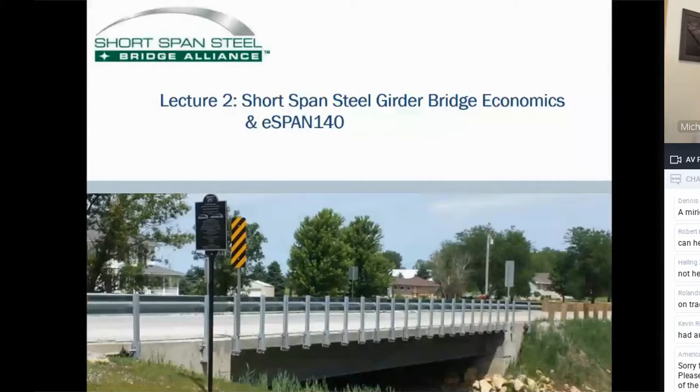As mentioned in previous webinars, the Short-Span Steel Bridge Alliance was formed to address two main concerns with the construction of steel bridges. The first is a misconception across the United States that for shorter span bridges, concrete is always less expensive than steel. The second issue is that a concrete bridge is easy to design using charts and tables, whereas a steel bridge design is an individual piece of art for each designed bridge.

Last week's webinar presented eSPAN140, an online tool for preliminary steel bridge design for simple span bridges up to 140 feet in length, so that steel and concrete bridge alternatives can be compared easily without an undue and costly design for the steel bridge.

Here, we will look at initial cost case studies for county and state bridges to show the competitiveness of steel and demonstrate that the life cycle costs for steel and concrete bridges are also competitive.

We start with that preconception that concrete bridges are less expensive than steel bridges in the short span market. Many owners and engineers believe this to be true, and many times steel is not even considered when there is a short span bridge need.

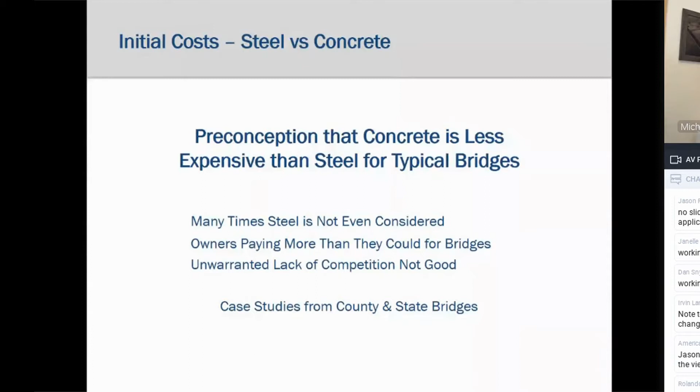The first case study is from Audrain County, Missouri from 2012. Dr. Michelson last week touched on this case study and a few more bridges there, but here we're going to go into it in a little more detail to really show the competitiveness of steel.

These two bridges were built by an Audrain County work group, so there is no contractor for the bridges. This is a special case study in that the Short Span Steel Bridge Alliance worked with the county engineer from before construction through the opening of the bridge to track all costs.

The steel bridge, Missouri Bridge 411, consists of 4 steel girders, a 47.5-foot span, a 24-foot roadway width, and a 2-foot structural depth. The concrete bridge, Missouri Bridge 336, consists of 6 precast hollow core slabs with a 50.5-foot span, a 24-foot roadway width, and a 2-foot structural depth.

These two bridges were built in the same year and are nearly identical except for a small difference in the span length. The engineer was asked to keep a detailed account of the costs for the construction of the two bridges so that a direct comparison could be evaluated.

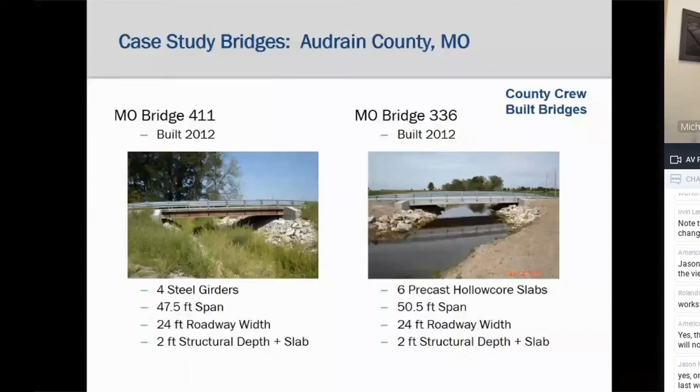This slide shows the total cost for the two bridges where the costs are broken into material, labor, equipment, guardrail, rock, and engineering. We can see that for the total cost of these two bridges, the steel bridge has a 19.3% savings over the concrete bridge.

The costs are calculated based on the square footage of the deck area for an equivalent comparison, since the concrete bridge is 3 foot longer.

However, comparing only total costs can be deceiving given the different site characteristics of the two bridges. For instance, here, we see that the concrete bridge had significantly higher engineering costs and lower rock costs, which has nothing to do with the actual constructed bridge.

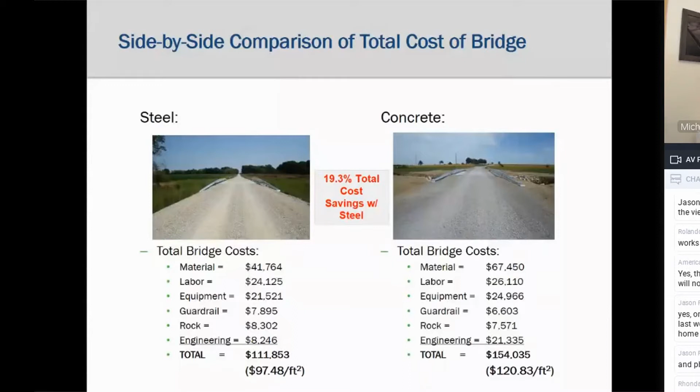So to address these differences, the engineering and the rock costs are removed from the total cost to get a better comparison between the two bridges. When the engineering and the rock costs are removed, the concrete cost a little bit over 98 bucks a square foot, whereas the steel bridge had a cost of just over 83 bucks per square foot, or a 15.4% reduction in cost.

However, we know there are still different site requirements that may influence the difference, such as roadway alignment work, approach work, grading and finishing, and other work.

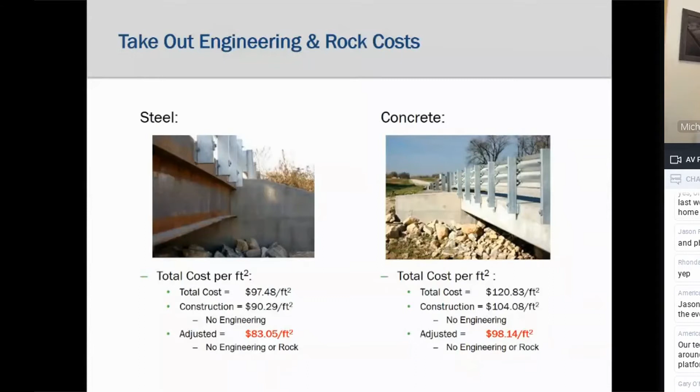So the engineer was also asked to separate out only the superstructure costs so that an equivalent direct comparison could be made for the two bridges. In other words, track costs from when the superstructure went in until the superstructure was completed.

So on this slide, these costs represent the costs associated with only the superstructure. This is a true apples-to-apples comparison of the costs for these concrete and steel bridges, since we could almost pick up the concrete bridge and put it on the steel abutments and vice versa. Removed from the total cost is all site prep work, grading, engineering, rock, abutments, and so forth.

We can see the cost for the materials, labor, and equipment for only the superstructure. The steel bridge costs $37.54 per square foot, and the concrete bridge costs $50.61 per square foot. The steel bridge is considerably less expensive for this comparison.

Now, one item to note is the equipment cost, where the steel bridge used a county-owned 30-ton crane. The concrete bridge girder members are heavy, and the county had to rent a 100-ton crane at a cost of $3,500. The other $500 for each under equipment was a rented skid steer for incidental work.

However, even if the county needed to rent a 30-ton crane at a cost of about $1,500, that increases the steel bridge cost to only $38.88 per square foot, still considerably less than the concrete bridge cost.

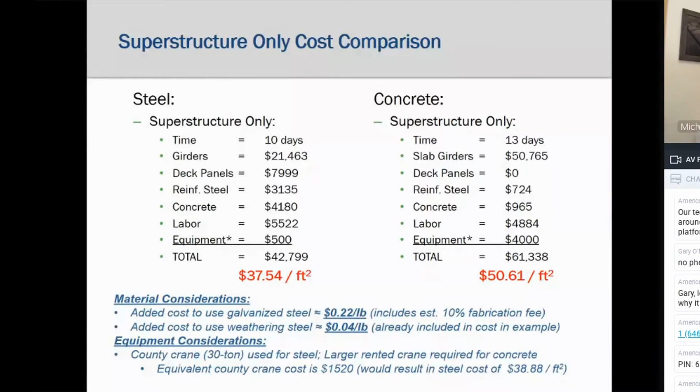So for these two bridges, as they were built, the superstructure-only costs show that the steel bridge option would have a savings of over 25% compared to the concrete bridge. That is 5 steel bridges for the cost of 4 concrete bridges.

This is for two almost identical bridges where they have the same structural depth, which means no difference in approach work, the same roadway width, the same guardrail system, the same abutments, and the same county crew built both bridges.

So what this demonstrates is that steel is competitive with concrete. Here it's actually significantly better. But the objective here is to show that steel is competitive with concrete, and the preconception that concrete is always less expensive is incorrect. Short span steel bridges can have, and many times will be, less expensive than a concrete option. The reason for these economies for steel bridges vary over the bridge fabrication and construction process.

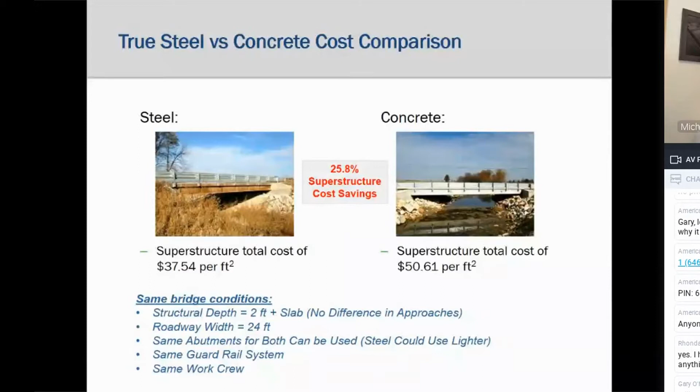For instance, we saw that one reason steel is competitive is that equipment requirements are less, since the steel bridge components are considerably lighter than the concrete components. In fact, many times, a backhoe can install a steel bridge.

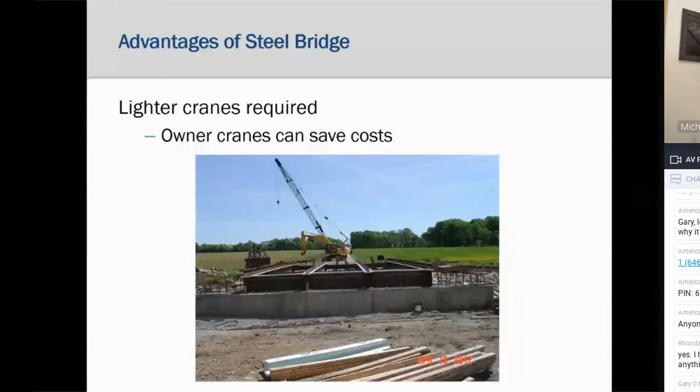For steel bridges, the dead load is significantly lighter, and lighter abutments can be used. Or some of the economical modular abutment systems can be employed, such as geosynthetic reinforced soil systems.

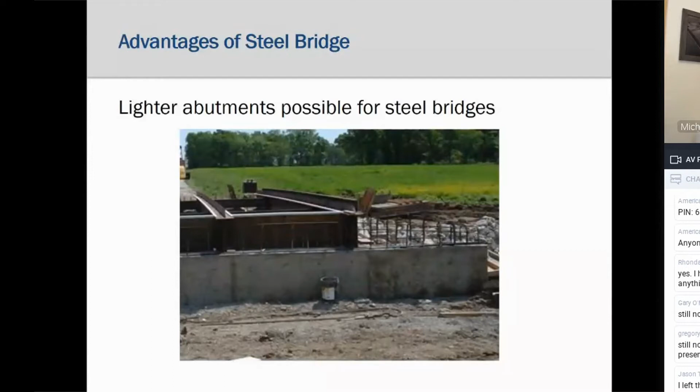Another benefit for the economy of steel bridges is the use of partial depth precast panels or corrugated metal deck systems that make the casting of the concrete deck efficient.

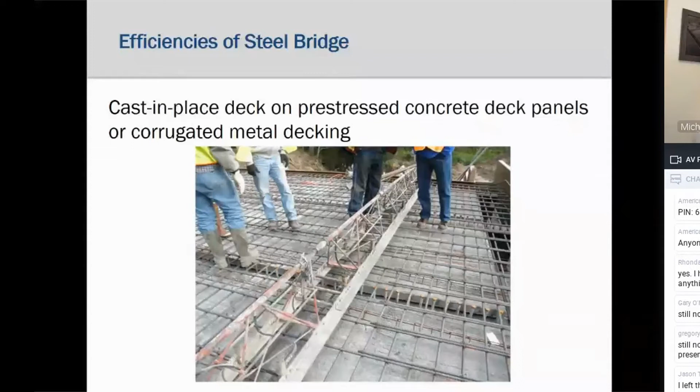We know that steel is a versatile material and that steel bridges can be made in many forms with complicated details in fabrication. However, these simple bridges do not require complicated stiffener or complicated diaphragm details. Simple details are cost-effective and easy to fabricate and easy to erect.

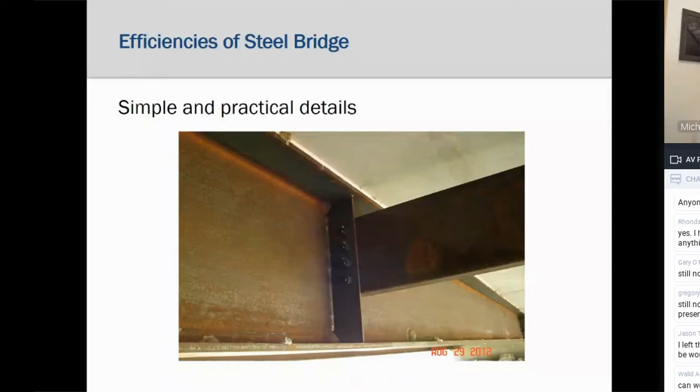Another costly component for bridges are rocker or pot bearings at the girder ends. Again, for these simple bridges, simple elastomeric bearings can be used, and smaller bearings used due to the lighter weight of the structure. Also, jointless decks with integral abutments lead to much lower deterioration rates and maintenance costs in the future.

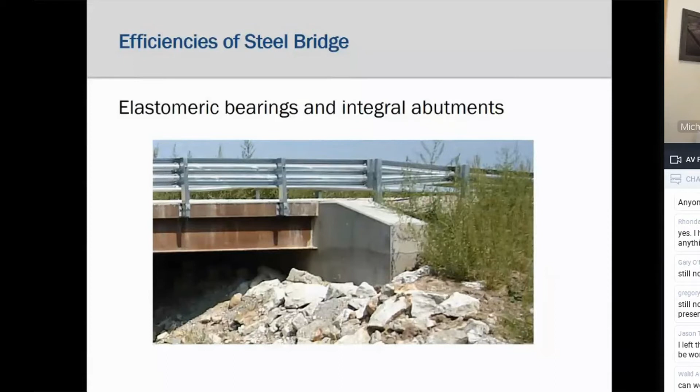Finally, one of the costs for steel bridges is corrosion protection, since regular steel rusts. However, weathering steel, when applicable, is low cost and requires little maintenance for long-term corrosion protection. If weathering steel is not applicable, galvanizing, metallizing, painting, or the use of stainless steel may be a cost-effective method for corrosion control.

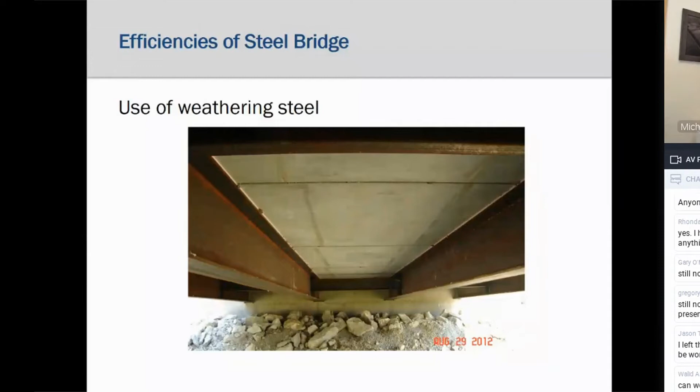So that was one example that Dr. Michelson showed last week, and we went into more detail here to show the competitiveness of steel. However, that was just one example, and like Dr. Michelson did last week, I'm going to show this table.

Because the Alliance also worked with the county engineer on other bridges built near the same time frame in the same county. This table looks at the total constructed cost. We were not able to look at only the superstructure of an additional 5 steel and 4 concrete bridges built in Audrain County.

At the bottom of the table, we see that sometimes steel is less expensive and sometimes concrete is less expensive. This is healthy competition, and this competitiveness is good for the owner and the public. These are examples of county bridges that show that both steel and concrete are competitive in the short span market, and both should be considered. The Short Span Steel Bridge Alliance has many more similar examples that are not shown here due to time.

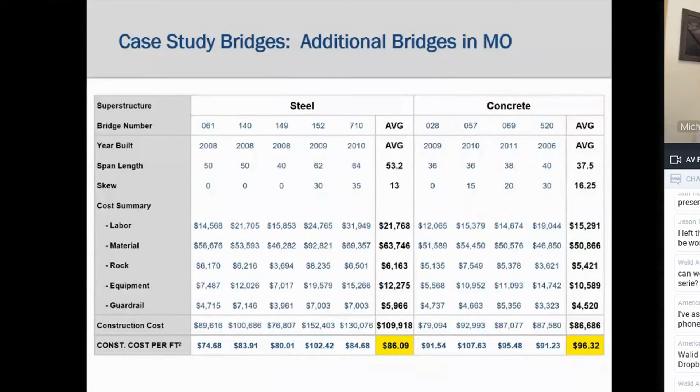So these examples were county-owned bridges. Next, we will look at a couple state bridges, also in the state of Missouri. Here are two nearly identical bridges, one steel and one concrete, that cross over the same highway near Columbia, Missouri. Both are two-span, with a concrete bridge just a little longer and a little wider, so the total cost will be divided by the deck area, again, for comparison. These were both design bid build projects with a contractor constructing the two bridges.

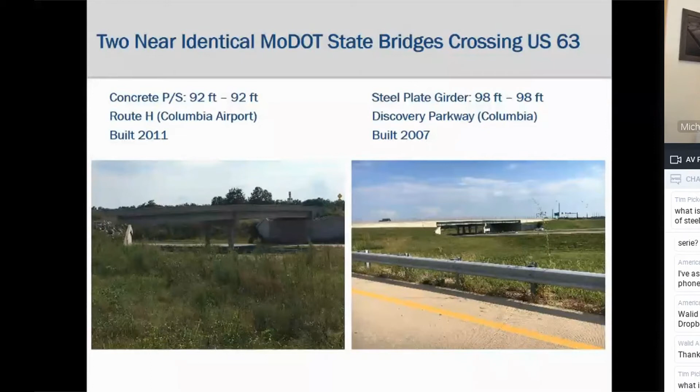Here are the costs for the two bridges. Both had non-bridge items such as conduit systems, a pedestrian fence, and an architectural facade, and these costs were removed from the total costs since they are not structural. We see that the concrete bridge costs $77.71 per square foot, and the steel bridge costs $72.94.

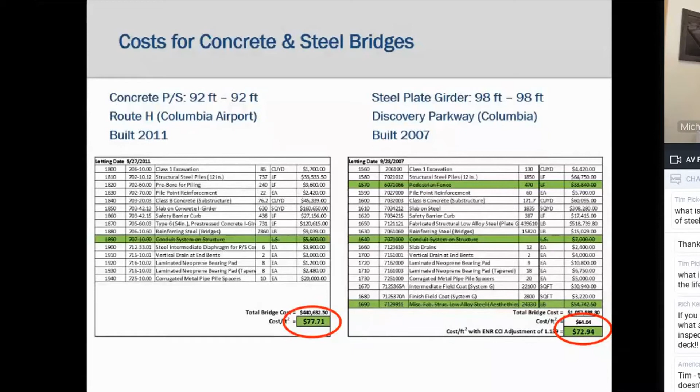However, there was a 4-year difference in when these two bridges were built. So what I did was, to account for the age difference and inflation, an Engineering News Record construction cost index of 2.7% per year was used to bring the cost of both bridges up to a common year of 2017. We see that the steel bridge was less cost at $85.58 than the concrete bridge at $91.18. Again, and not to pound on this too much, but again, two nearly identical bridges, this time state bridges, that show that steel is competitive with concrete.

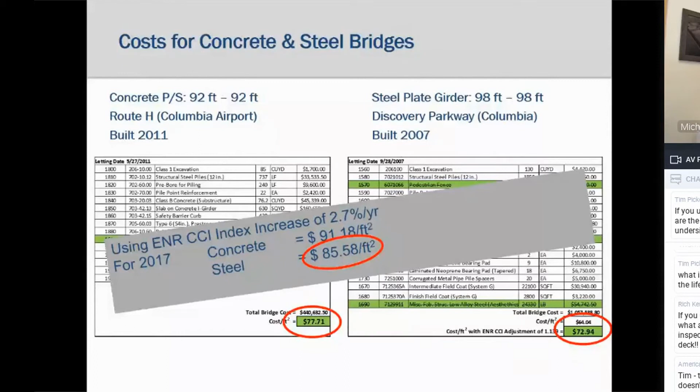So what we have seen here, and with many more examples I could have shown but have not, is that steel is competitive with concrete bridges in the short span market, and that owners and engineers should consider both materials for their bridge needs. The preconception that concrete is less expensive than steel in the short span market is a misconception. Both steel and concrete are competitive, and competition is good for the owner and the public.

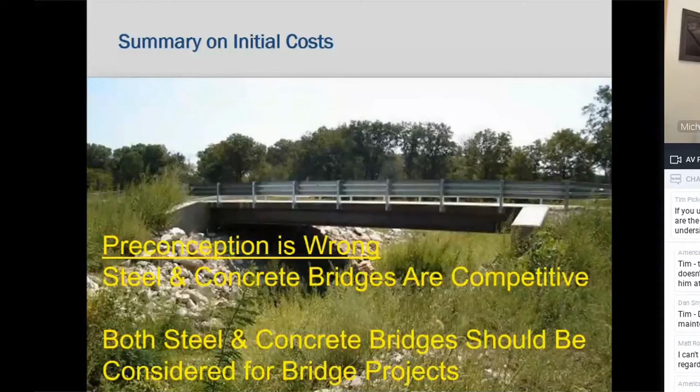So moving on, first cost is just that, the cost for putting the bridge in place. Responsible owners are also concerned about future maintenance costs and service life. The question about life cycle costs routinely comes up as we talk about steel bridges across the country. Actually, what is asked is, which type of bridge is best for life cycle costs? And both the steel industry and the concrete industry have offered anecdotal evidence, but have not, until now, had good evidence on which bridge type is best.

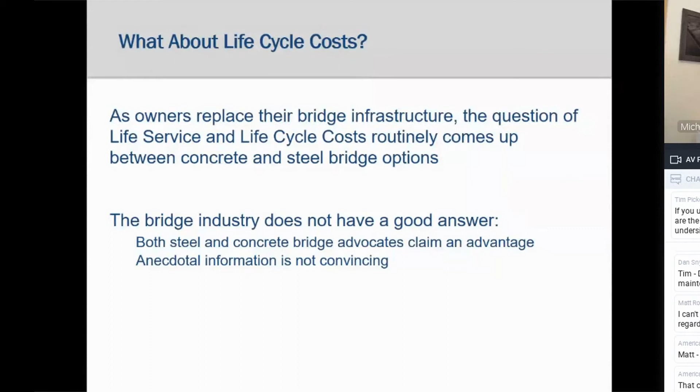So a study was conducted that examines the historical life service, meaning the performance and maintenance, and agency life cycle costs, meaning the true cost for building and maintaining the bridge over its life, of typical steel and concrete bridges in Pennsylvania. A historical study was conducted so that the results showed what actually happened to the bridges instead of anecdotal guesswork from the steel and concrete industries. The Pennsylvania Department of Transportation had good records on their bridges and offered the PennDOT data for the study.

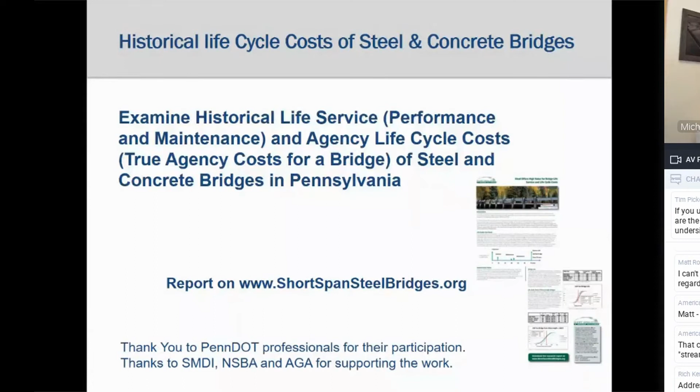To determine the life cycle cost for a bridge, one needs to know the full history of that bridge. This includes the initial cost and the year it was built, and all maintenance that occurred over the life, including departmental maintenance and contractor maintenance. And of course, the lifespan for the bridge, or when it will be replaced. All of the bridges in the PennDOT database were still in service, so an end-of-life model was needed to estimate the life of the bridge.

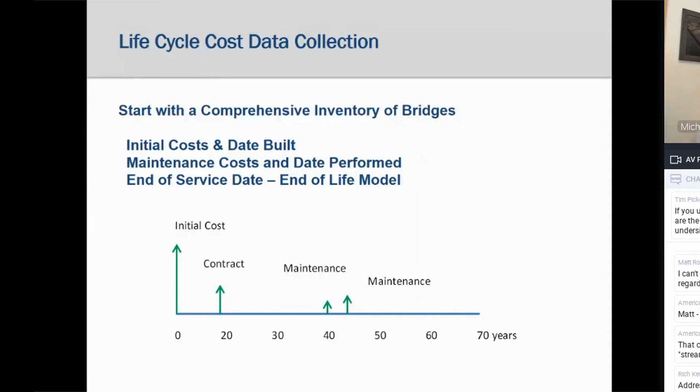The study's objective was to compare life cycle costs of typical concrete and steel bridges. So there were criteria that each bridge had to meet to be included in the study. The criteria included considering only typical steel and concrete bridges, selected as precast I-beam, precast box where the boxes were adjacent to each other, precast boxes where the boxes were spaced apart, steel rolled beam, and steel plate girder bridges. In addition, precast concrete became a mainstream construction method, and modern steel design and detailing started in about 1960. So bridges built after 1960 were considered.

Each bridge that was used in the database had to have complete records for initial costs and date built, and accurate dates and costs for any type of department or contractor maintenance. Since the study was looking for typical bridges, it removed any bridges that had exceedingly high or low initial costs. And all the costs that were used were based on the PennDOT recorded costs.

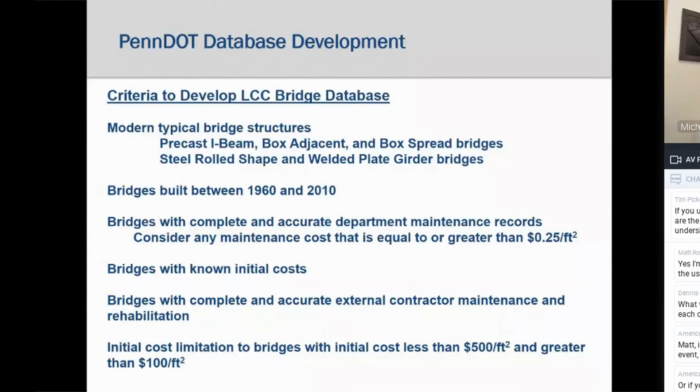PennDOT has over 25,000 bridges in their database. Of those, almost 8,500 were of the 5 types considered in the study, and of the 8,500, over 6,500 were built between 1960 and 2010, the end date of the database, for a potential study database.

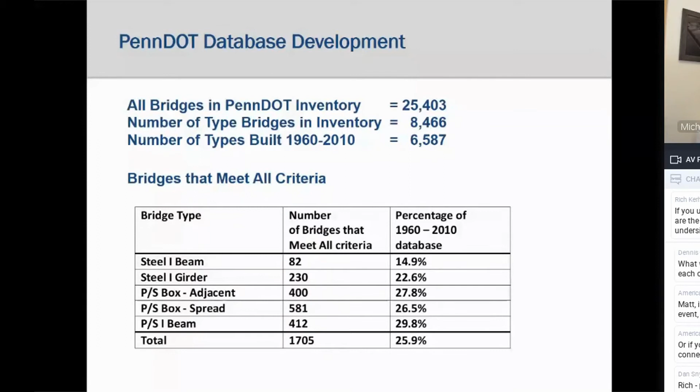When the bridges were subject to the criteria, many of them did not have accurate and complete life history information, which left a database of a little over 1,700 for the life cycle cost study. As this table shows, this is over 25% of the potential bridges represented in the life cycle cost study, which is a pretty good representation.

All of the 1,700 bridges are still in service, so a bridge life model needed to be developed to predict when the bridge would be taken out of service or replaced. The model is based on the inspection superstructure condition rating, which varies between 0 and 9, 9 being a perfect bridge, 0 meaning it's no longer there.

It was assumed that the bridge had a superstructure rating of 9 when it was built. Then a deterioration rate was determined based on the condition rating in the year 2014 by the change in rating divided by the years in service. With the deterioration rate, the remaining life could be estimated by assuming the bridge would be replaced when the superstructure condition rating became a 3. The bridge life is the sum of the remaining life added to the current age.

I understand this is just a linear deterioration rate, which is not completely accurate. We looked at other deterioration models from PennDOT where it was bilinear, where deterioration increased faster at the end. But we found that it didn't matter, that it didn't change any of the comparisons, and the linear rate was so much easier to apply.

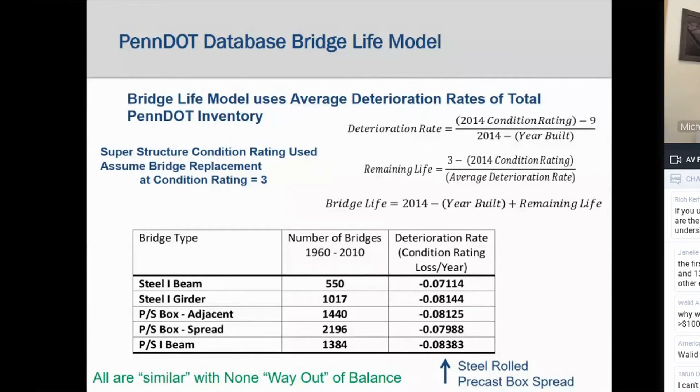The second aspect is the statement at the bottom left that all are similar, with none way out of balance. The results show that the deterioration rates for all 5 types of bridges are not far off from each other. There is no one type of bridge that greatly outperforms the others, nor is there a type that is significantly worse than the others. We will address this statement, all are similar with none way out of balance, towards the end of this presentation.

Now we will look at a life cycle cost analysis of an example bridge that demonstrates the work of the study. The bridge is a precast spread box bridge built in 1969 with 3 spans and a deck area of 7,600 square feet. In 2014, the base year of this study, the superstructure condition rating was a 5.

Knowing the average deterioration rate for spread box bridges is 0.08, the estimated remaining life when the condition rating reaches a 3 is 25 years. Given that the bridge is 45 years old, the predicted lifespan for the bridge is 70 years.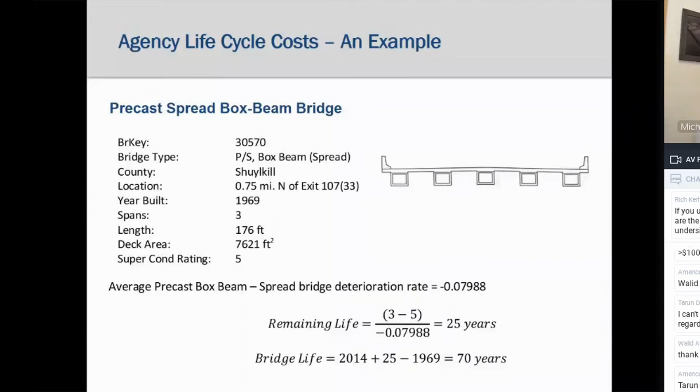To compare life cycle costs over the database, inflation must be taken into consideration. So all of the bridges were assumed to be built in 2014, and all of the costs inflated by the Engineering News Record construction cost indices, like we saw for the earlier case study.

So this bridge in 2014 dollars costs $143.45 per square foot, and the maintenance costs in 2014 dollars occurred at years 19, 40, and 44. The study used constant 2014 dollars for all future costs, since the discount rate considers inflation for the future.

Now the life cycle of the bridge can be developed with the dates and the costs in 2014 dollars. Using a discount rate from the Federal Office of Management and Budget of 2.3%, which takes into consideration inflation of future 2014 dollars, a present value cost of the bridge's life cycle can be determined to be $154.50 per square foot by discounting the future cost to the year 2014. This means, more or less, if $154.49 was put away when the bridge was built, that amount could pay the initial cost and all future costs for that bridge cycle.

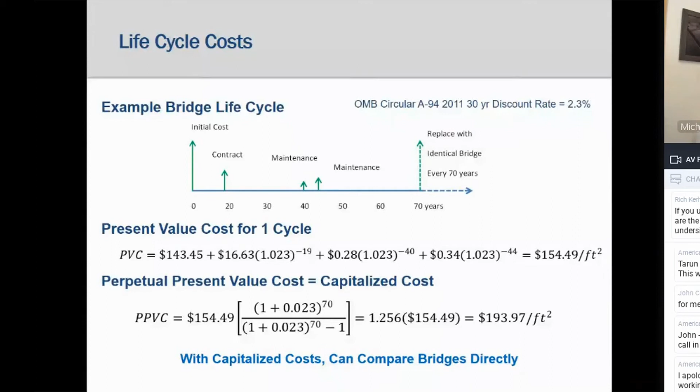To further make sure the study compared typical bridges for the 5 types of bridges, bridges that had capitalized costs outside of 1 standard deviation from the mean of that bridge type were removed. This is one of those statistical things we do, but if I considered all of them, the results didn't change at all. But we still did this. This left almost 1,200 bridges of the 5 different types that were used to study the results.

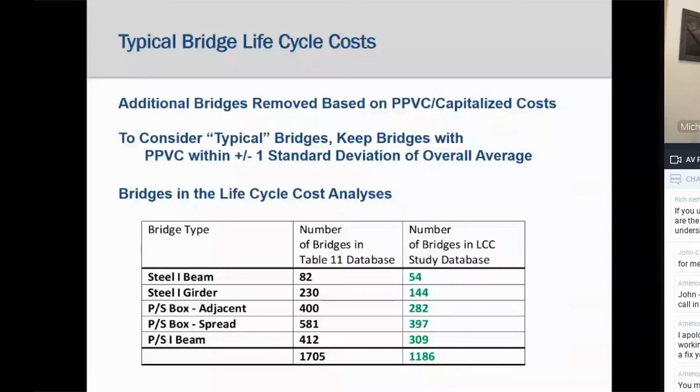So we did all of that on all those 1,200 plus bridges, and the bridge database was organized by bridge type in 3 Excel worksheets for each type. The first worksheet was the bridge information with location, years built, number of spans, bridge length, deck area, geometry, and bridge materials. The second file was the department and external contractor maintenance performed on the bridge. And the third was the initial and life cycle cost results. Studies of the final report were produced from this database of bridges.

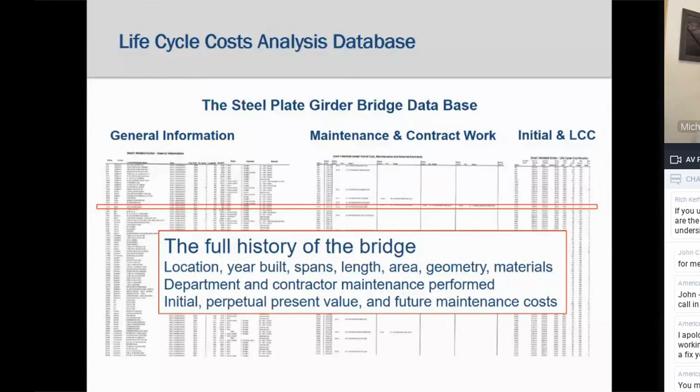But the full detailed report can be found at www.shortspansteelbridges.org. An additional study after this first one was completed was performed to look at the life cycle costs of galvanized steel girder bridges, and that report can also be found at the website.

So now for some results. For the results for bridge life, the database of the 5 types of bridges show that the rolled beam bridges have the longest predicted life at over 81 years, and the second was the precast spread box bridges at just under 80 years. However, again, none of the bridge types varied much from the others with a 7-year spread, and at the bottom is that statement that all are similar, with none way out of balance.

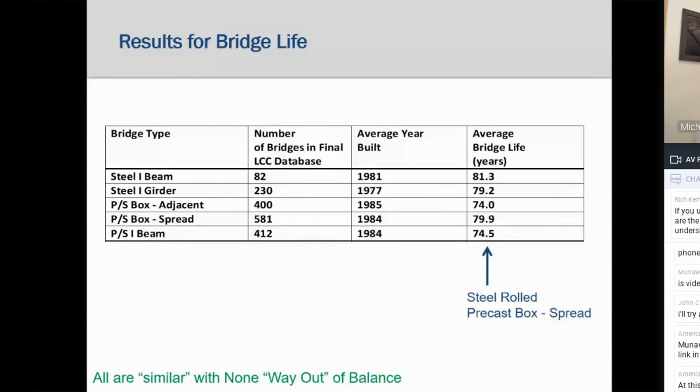So that's the average. Maybe a better way to look at predicted life that considers not only the average life but also the standard deviation of the life is a statistical cumulative density function, or CDF. Here it is assumed that the data is normally distributed, and it kind of was. And with the CDF, the question can be asked: what is the probability that a type of bridge will last at least 75 years, which is the expectation for modern bridge construction?

The results here show that there is a 73% chance that a rolled beam bridge will last at least 75 years, and a 65.6% chance that a precast spread box beam will. However, it also shows, according to the data, there is only a 44.3% chance that a precast I-beam bridge will last 75 years or more.

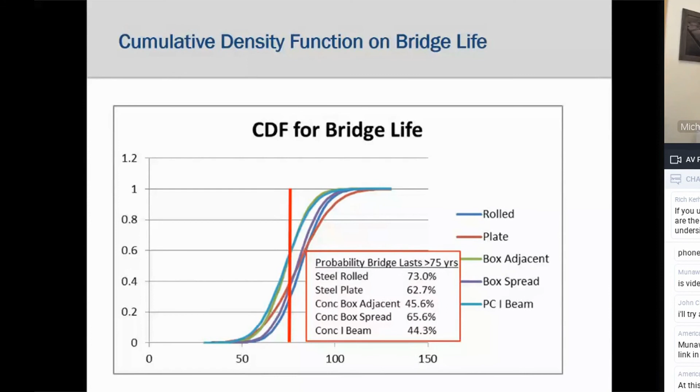Moving on. This table shows the results for capitalized costs for all the bridges in the database. Here we see that the precast I-beam bridge has the lowest capitalized cost, and the steel rolled beam is second. The table also shows the initial cost, present value costs of future maintenance, average length, average number of spans, average year built, and average life.

This is where we need to be careful with the comparisons. Directly comparing all of the bridges without considering the differences in these variables can lead to misleading results. For instance, plate girder bridges in the database have an average of over 4 spans per bridge, whereas the adjacent box precast bridges average just over 1 span per bridge. Number of spans, along with average length of the bridge, has a significant impact on costs.

In a couple of slides, we will examine a more consistent set of bridges based on span length for a more consistent comparison. And of course, the full report examines these different variables in depth.

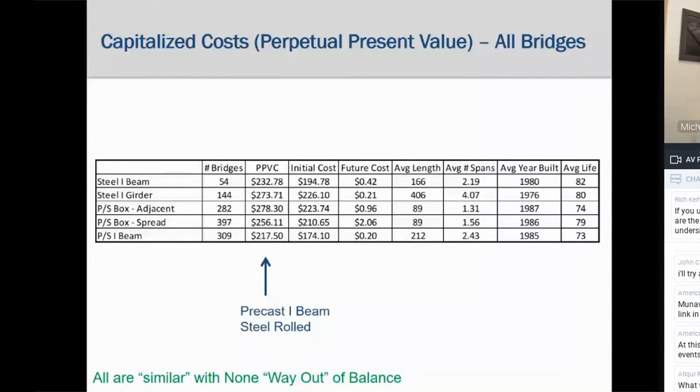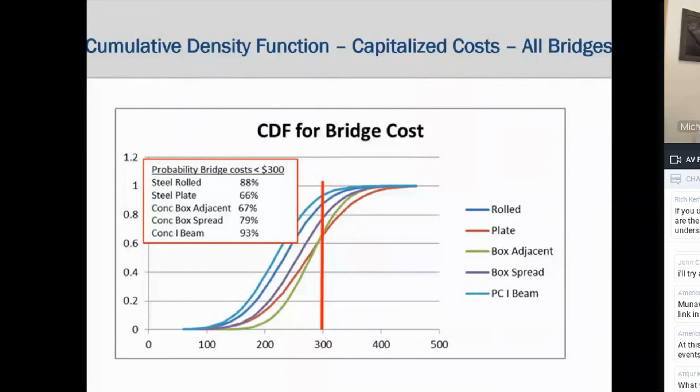So this table reduces the full database to only bridges with lengths of 140 foot or less. It does not restrict it to simple spans, but only by the length. In the full report is one that looks at just simple spans. There is much more consistency in the average length and average number of spans, which makes a better comparison than the full database results. Here, we see that steel rolled beam bridges have the lowest capitalized cost at $266.24, with precast spread box bridges at $272.20 per square foot.

However, there is still that statement that all are similar with none way out of balance on the bottom left there. Now, the plate girder bridges here are a little high, but that would be expected in these short spans since they are not as economical below about 80 feet, and many of these bridges would be below 80 feet.

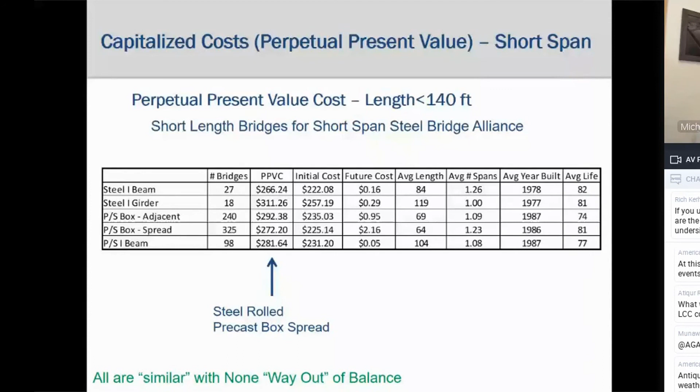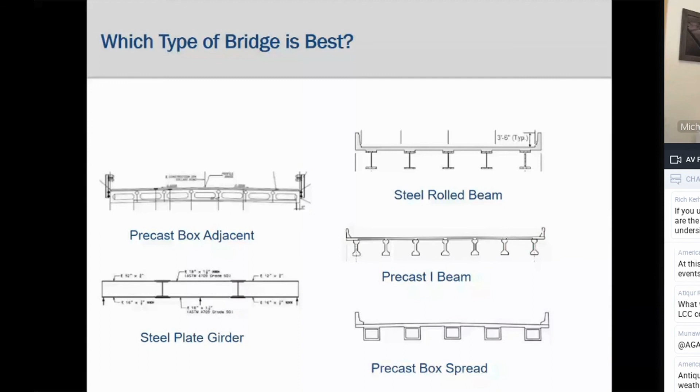So now we're ready to get back to that original question from owners of which type of bridge is best for life cycle costs? The precast box adjacent, the steel plate girder, the precast box spread, the precast I-beam, or is it the steel rolled beam bridges? And this is where we come back to that statement that all are similar with none way out of balance. The overall weighted average capitalized cost for the 5 types of bridges is $252.40 per square foot. If we look at the averages for each bridge type, that is within 14% of that weighted average.

Now, knowing that the standard deviation for the different bridge types ranges from $48 to over $65 per square foot, or a better way to look at that is the coefficients of variation range from 20 to 25%. When we compare that to a variation of the means of only 14%, what that means is that any one type of bridge may be most economical for a particular given bridge project, that there is no one type of bridge that clearly beats the others.

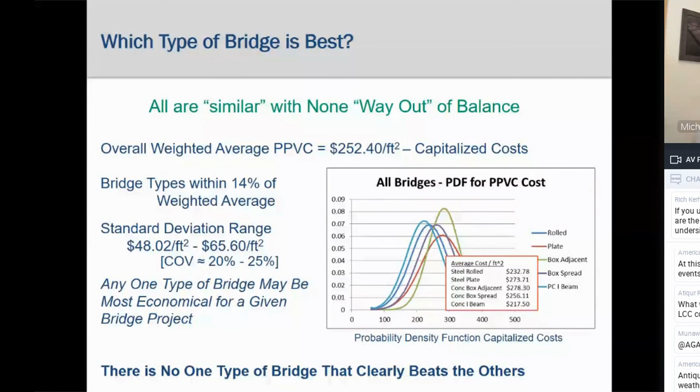So the conclusions of the life cycle cost study are: typical concrete and steel bridges are competitive. And what we saw is they're competitive on initial costs, future costs, life cycle costs, and bridge life. For any given bridge project, concrete or steel bridge types may be the most economical. Again, that preconception that concrete is always less expensive than steel is a misconception.

And finally, and it's even bolded here because this is my #1 conclusion, is that owners should consider both steel and concrete alternatives for individual bridge projects. Competition between steel and concrete bridges is healthy for the bridge industry, the owner, and the public. So that concludes the short span bridge economy and life cycle costs webinar.